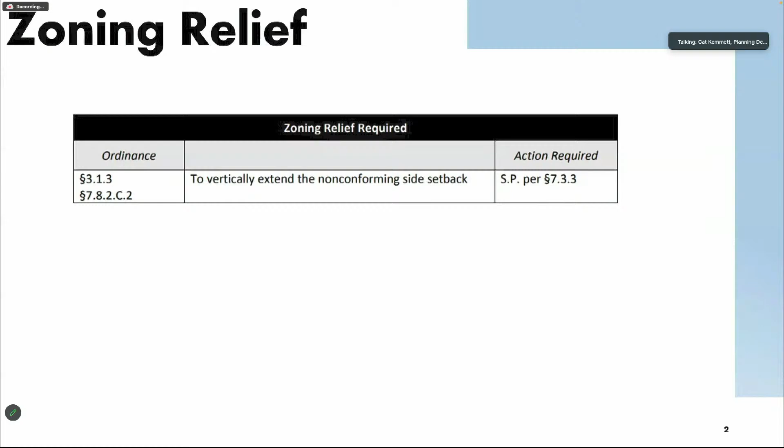First we'll hear from planning. Cat, I believe that's you. Good evening, everyone, hopefully everyone can see and hear me. This is petition 328-24, a special permit for 228 Grove Street. The petitioners are seeking to construct a second-story addition to the existing residence, which will vertically extend a non-conforming side setback, requiring special permit relief. In reviewing this request, the council should consider if the proposed addition will be substantially more detrimental than the existing non-conforming structure is to the neighborhood.

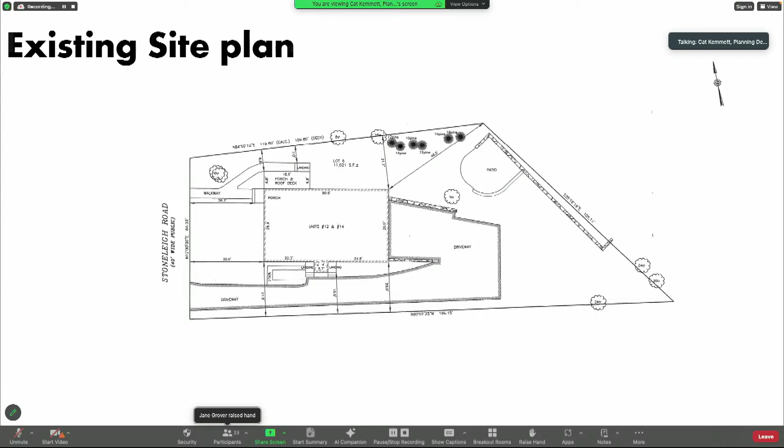This is the site plan. The site is improved with a 2-story single-family dwelling built in a colonial style and constructed in 1922. The lot slopes downward from the front to the rear, and there's a shed at the rear of the property, with a curb cut and paved driveway to the left of the house off Grove Street. There are existing nonconformities on the site, including the frontage, the lot size, and both side setbacks. The left side setback is 8.7 feet where 12.5 feet is required, and the right side has an 8.3 foot setback where 12.5 feet is required.

This is the proposed site plan. The petitioner proposes to construct a 2nd-story addition over an existing sunroom on the 1st floor. The majority of the addition will be within the existing footprint of the building, with the exception of a small cantilevered portion, which will extend beyond the footprint with supporting columns. So about 28 square feet will be outside of the existing footprint.

All of the setbacks will remain the same as they are now, so they won't be getting smaller, but the addition will vertically extend the non-conforming side setback on the right. So it does still require special permit relief. There'll be no change to the height or number of stories. The relief is limited to the vertical extension of the setback.

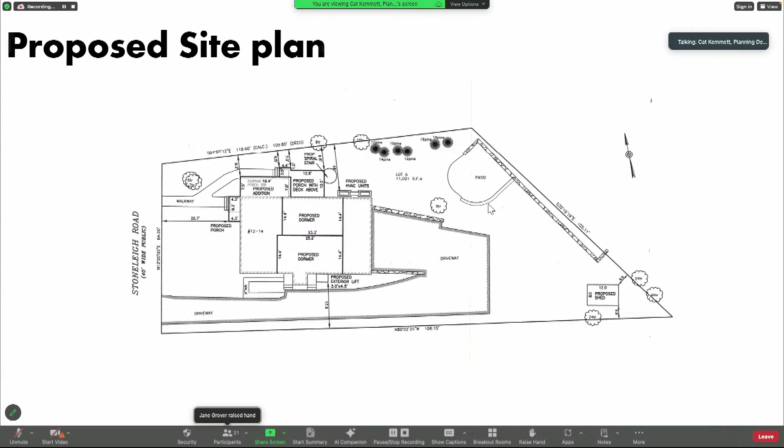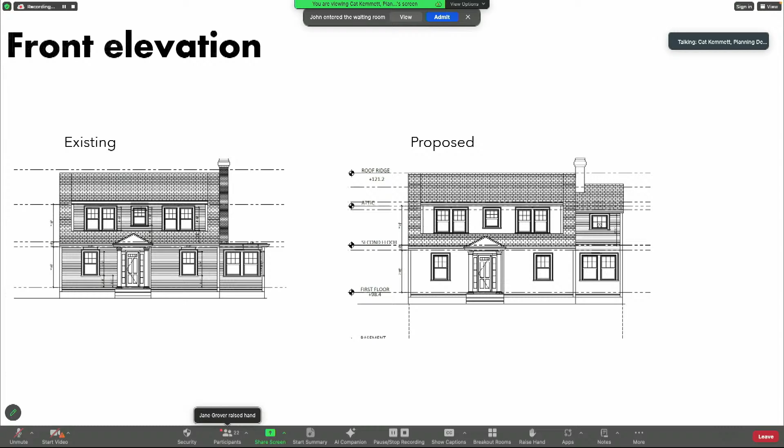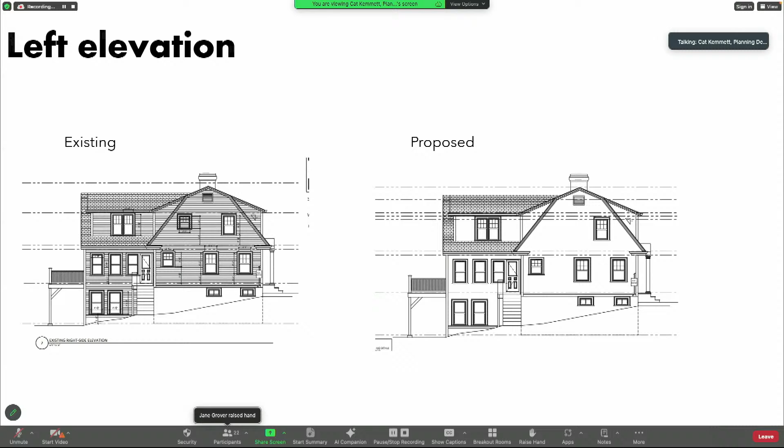This is the front elevation. The addition will be visible from the street, so the setback remains the same, but it will be built up vertically here. This is the left side. This setback will remain the same. There won't be any work visible from this vantage point. This is the right side, which will be most impacted by the petition proposed here.

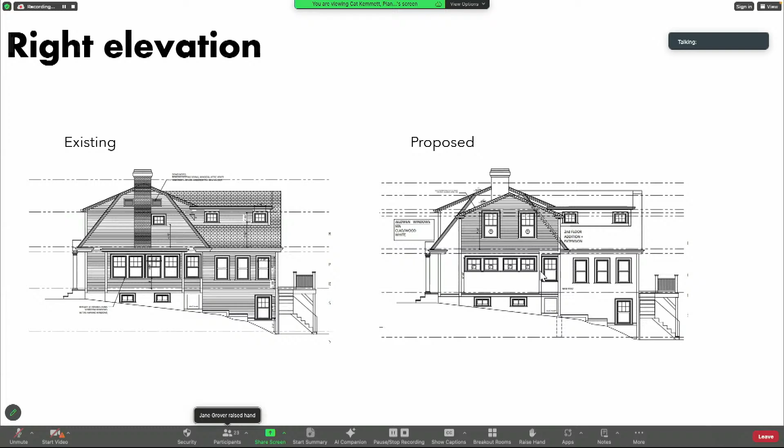Overall, staff have no significant concerns with the work proposed here. It's mostly within the existing footprint, so the amount of impervious added is minimal. It doesn't reduce any of the existing setbacks other than extending one upward, and it complies with other dimensional regulations, including height, FAR, and open space. So we believe any impact should be a fairly minimal negative impact on the abutters.

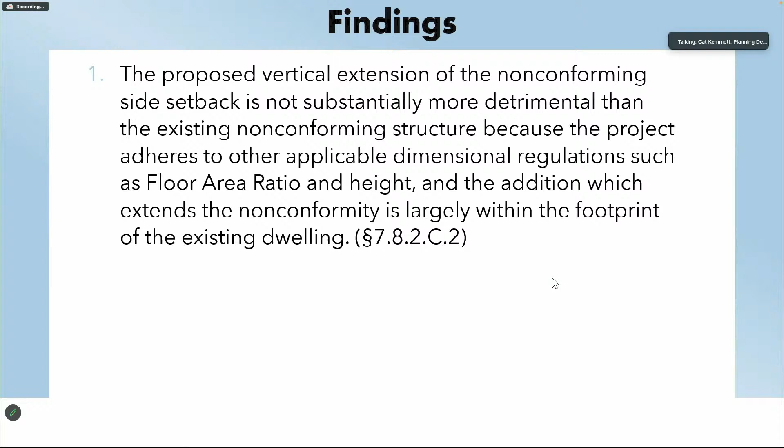And it would be the standard conditions of plan referencing, building permit conditions, and occupancy. Thank you, Ms. Kemmett. Does anyone have any questions about those standard conditions? If not, let's take a vote.

Counselor Block, Aye. Counselor Downs, Aye. Counselor Farrell, Aye. Counselor Kelly, Aye. Counselor Leary, Aye. Counselor Lovovitz, Aye. Counselor Lucas, Aye. Counselor Laredo.

Motion passes. Thank you, everyone, and good luck on that project, and thank you for being here, Jane Grover.

Can you please explain what happens after this? What happens after this is it will come to a full council meeting, usually at our next regularly scheduled meeting. The full council will vote on it then, all 24 members, and then you'll be able to move forward. Wonderful, thank you so much.

Sure, thank you again. The next item is number 329-24, which is a request to waive 2 parking stalls at 15 to 17 Playstead Road. Good evening, I'm Joe Adonisty, and I'll be covering this proposal.

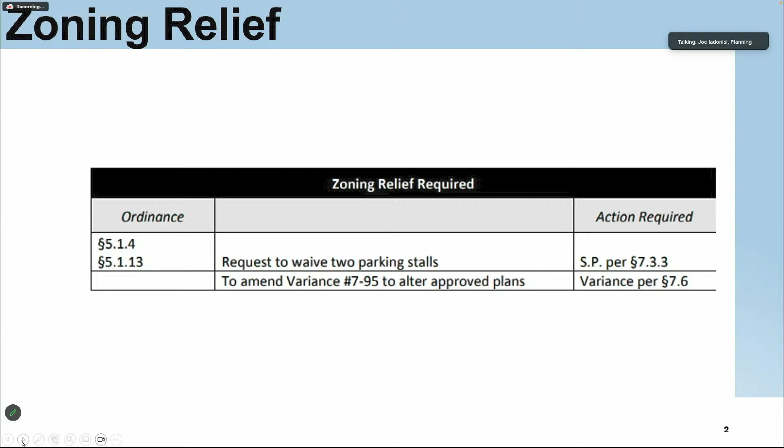So some background: the variance allowed them to waive the minimum lot area per unit, as the lot is undersized at just over 5,100 square feet, and that allowed them to have their 2-family dwelling.

Last year, they submitted a building permit to underpin and finish the basement, which basically meant that they wanted to lower the floor of the basement. But they went a little bit beyond the scope of that and closed off the garage.

So this would be relief after the fact, which I confirmed by talking to the Inspectional Services Department and taking a look at the property and seeing that the garage is in fact closed off. So the bottom floor is habitable space.

And just this past Friday, we had a complaint to ISD reporting 2 short-term rentals on the premise. One was confirmed to be active, and a violation has been issued.

So with that, and I know Jonah Temple, city from the city law office, is on the call as well, if he needs to clarify any of this. But typically, the guidance is to separate any zoning violations from what is actually before us. And the proposal here is for relief of 2 parking stalls for a 2-family.

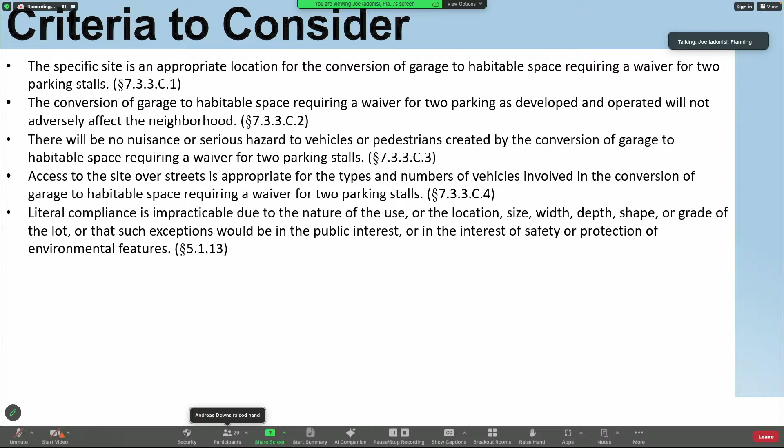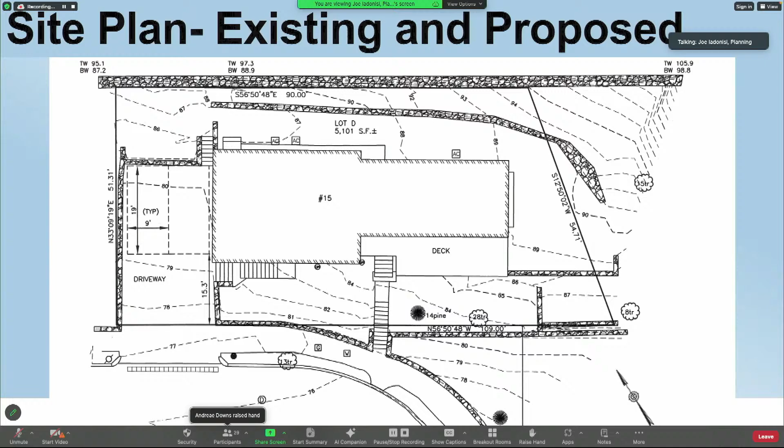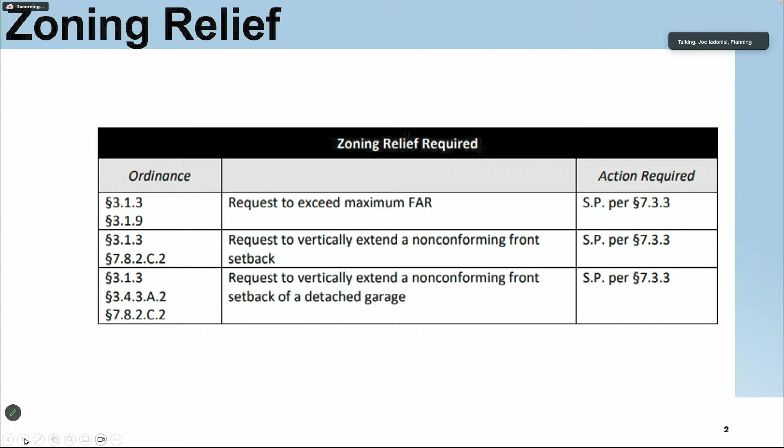There are three items which Councilor Kelly just described: exceeding the maximum floor area ratio, vertically extending the non-conforming front setback, and vertically extending the non-conforming front setback of the detached garage. When considering the criteria, it is whether the specific site is an appropriate location for the additions that will further extend the non-conforming floor area ratio and non-conforming front setbacks of the principal dwelling and the garage.

That the additions will further extend the non-conforming floor area ratio and non-conforming front setbacks of the principal dwelling and the garage as developed and operated will not adversely affect the neighborhood. That there will be no nuisance or serious hazard to vehicles or pedestrians created by the additions.

That access to the site over streets is appropriate for the types and numbers of vehicles involved in the additions that will further extend the non-conforming floor area ratio and non-conforming front setbacks of the principal dwelling and the garage.

That the proposed increase in the floor area ratio from 0.33 to 0.56, where 0.45 is the maximum allowed by right, is consistent with and not in derogation of the size, scale, design of other structures in the neighborhood. And lastly, that the proposed extension of two front setbacks for the principal dwelling and the detached garage is not substantially more detrimental than the existing non-conforming use to the neighborhood.

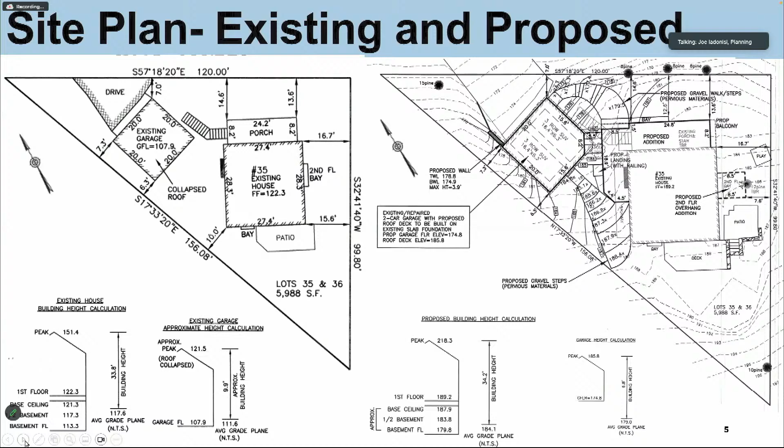On the site plans, the grading changes are generally limited to create a slope upward that supports the steps, with some level area in between where the steps are proposed, plus a walkway to a roof deck on top of the garage. That's where the most significant fill and grade change is, with fill up to about 4 feet. Otherwise the fill and grade changes are limited to the steps and aren't used to manipulate the overall height, sink the basement, or change the floor area ratio calculation in any meaningful way. Minor grade calculations result in a 0.4 foot increase in overall height, plus some work with dormers I'll show on the elevations.

As you see on the Google Maps and Google Earth view, there is that significant slope. The front right, where the minivan is located, is where they're proposing the garage. They're planning to add in front, where the porch is, from the basement through the first floor and second floor, with an additional dormer and roof deck area above the second story. On the left, they have a library that will be in between floors.

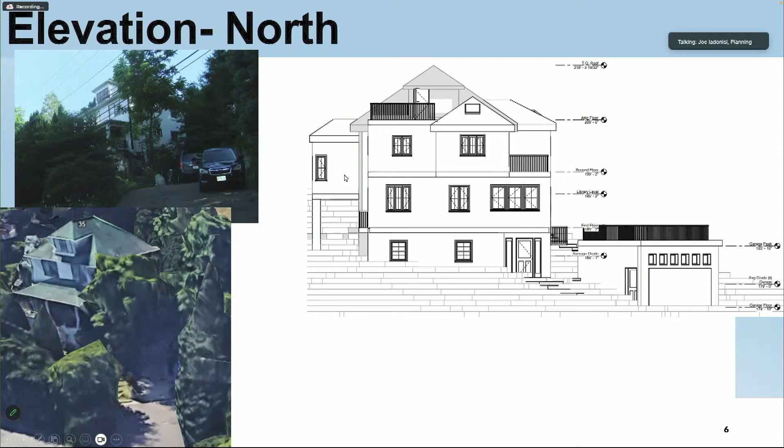A look at the west elevation shows where they're pushing out a little toward the west, or right side, of the house, going up to just above the second story but not all the way up to the top of the roof line.

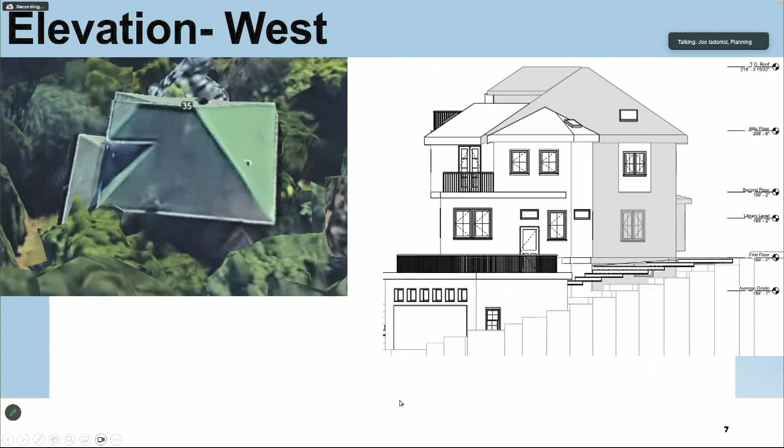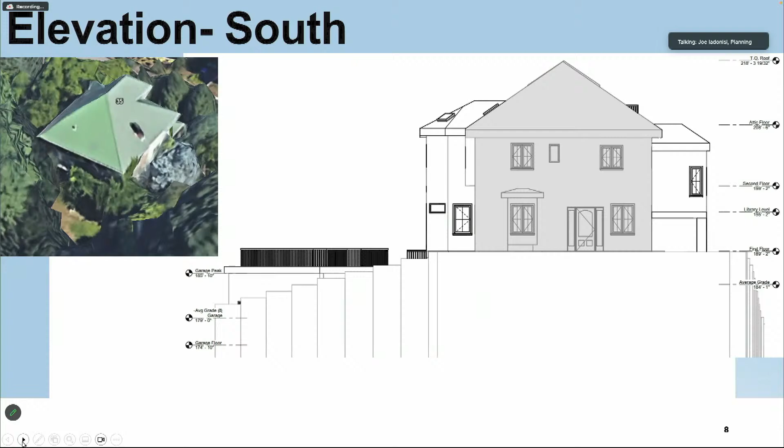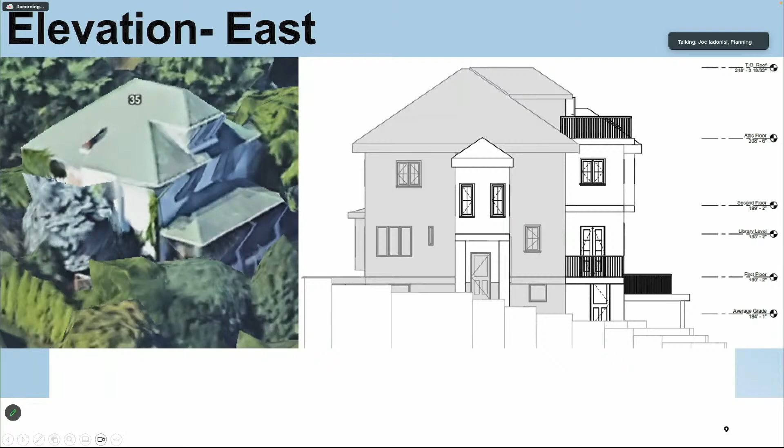Thank you very much. Is somebody here for the petitioner?

Thank you, Madam Chair, members of the committee. For the record, my name is Terry Morris, an attorney with offices at 57 Elm Road in Newton. I'm pleased to represent the homeowners, Peter and Mary Jo Dennis, and their two children, Sam and Alan. I also want to commend Mr. Iadonisi for his very detailed explanation of the reasons for the floor area ratio increase, largely dictated by the topographical condition of the site and the shape of the lot.

I also want to introduce, on screen, Ms. Megan Tarosian, our architect, part of our architectural team, and if possible she may share the screen. Also with me this evening is our architect, Mr. Ron Jarek, as well as Mr. Dennis, to answer any questions.

If we could, we'll start with the presentation. I think Mr. Iadonisi has shown the site plan and the area map, so we can skip through those and go right to the floor plans.

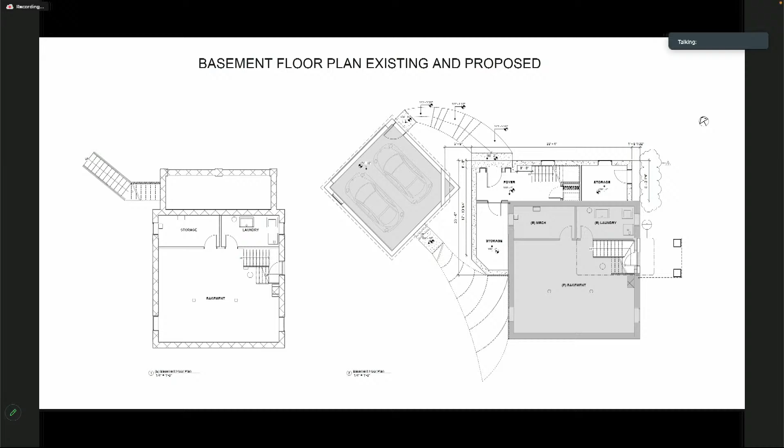Actually, I think we have the photographs, don't we, Megan? Probably it's helpful to see.

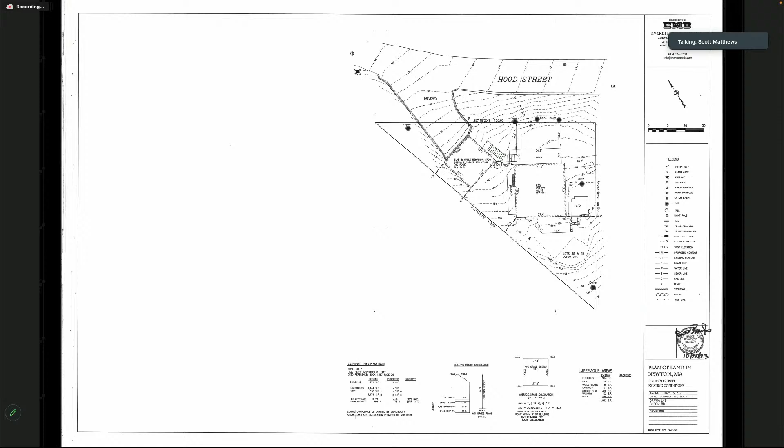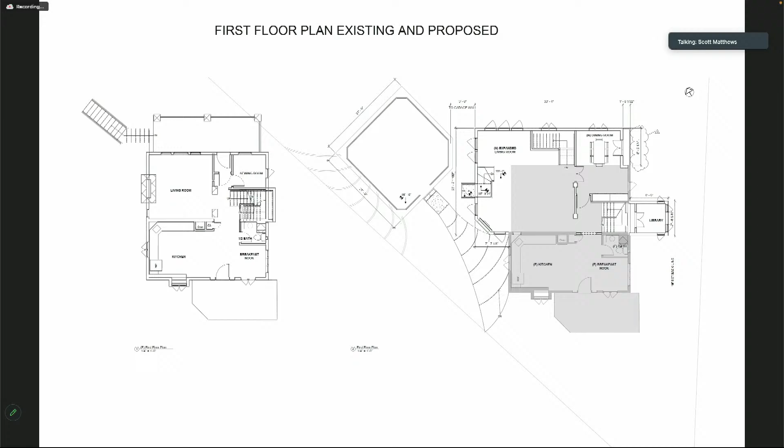You can see that the living room is quite modest, and to the upper right-hand corner of the screen there's a sewing room in the existing plan that, with the expansion, has now allowed for the creation of a dining room and an expanded living room. If we go to the next slide, please.

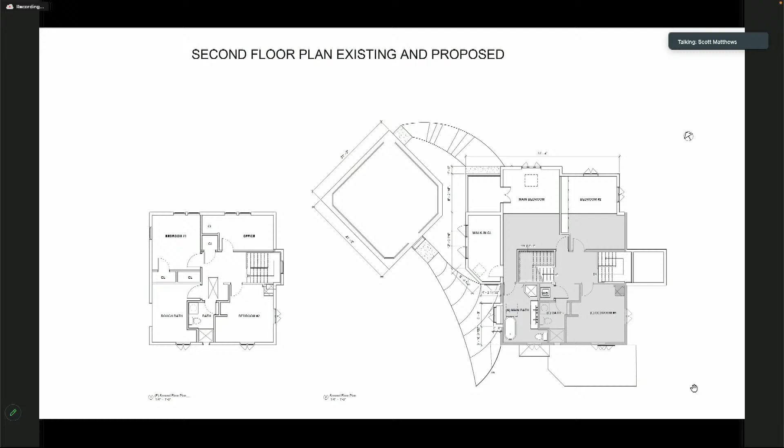You can also see on the right-hand side where Mr. Iadonisi has shown the extension on the east side of a small library, one-story addition. Next slide, please. There you have the attic space.

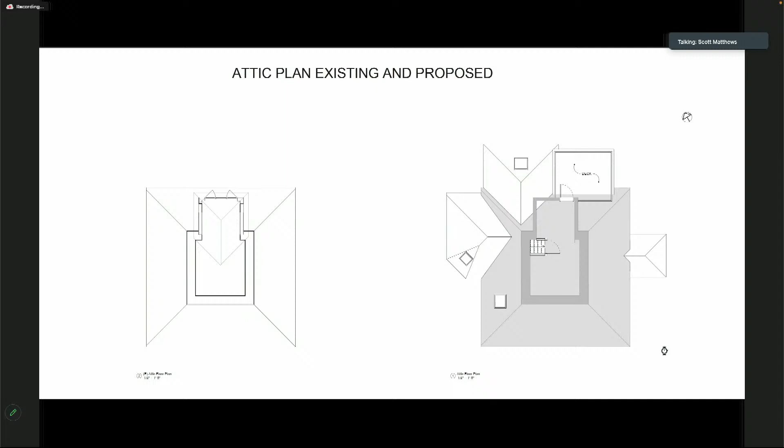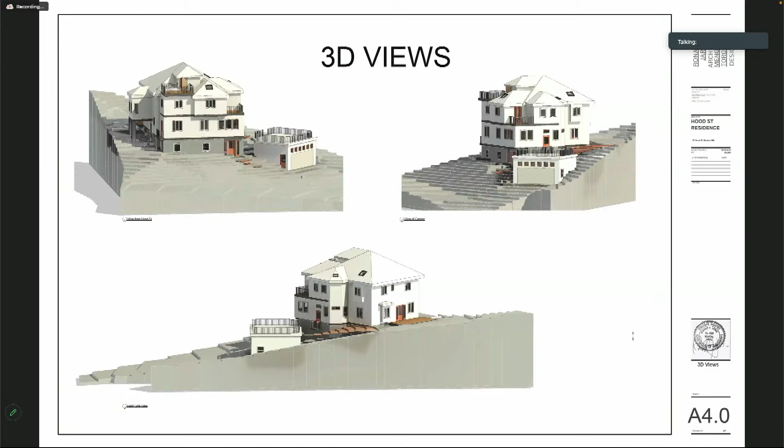Next slide, please. And here we have an actual to-scale drawing showing what the finished garage would look like in the foreground, and in the background showing the house as upgraded and refurbished. And with that, Madam Chair, that concludes our presentation.

But as I say, Mr. Dennis is here to answer any questions the members may have about the changes being made to accommodate his family's current needs. Thank you. Thank you very much, Mr. Morris.

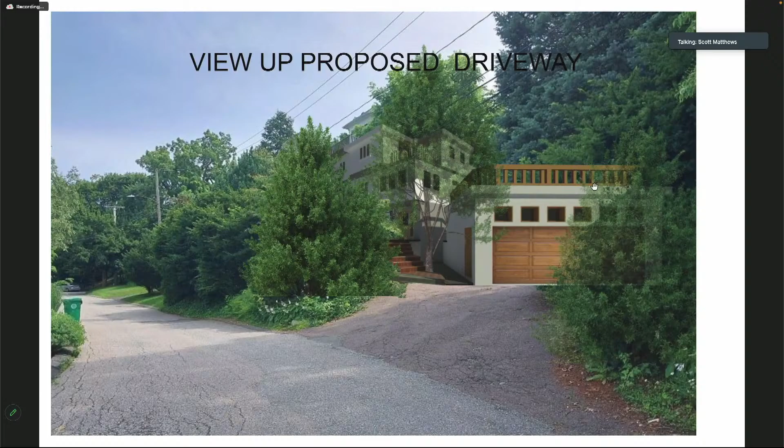Are there any members of the public, either in the chamber or on Zoom, who would like to speak on this?

Shockingly, no. So we can ask the question, though: did you reach out to the neighbors? Are the neighbors aware of this project, and what have they had to say about it? If nobody's here to speak, that's a question we might want to ask the petitioner to address at some point. I guess I'm asking that question. You don't have to answer right now. Others may ask that when it's their turn.

If no members of... Mary Lee Belleville.

I tried to answer my question by looking at the documents. This went before Historic Commission. Was it preferably preserved and they've gone through that, or did they approve the plans? It was determined by the Historical Commission that the property was not preferably preserved. Okay, but it wasn't a total demo, right?

No, it's not a total demo. So they made that determination administratively, which usually indicates it was a rather simple, clear-cut decision if they do that and don't bring it to the commission, typically.

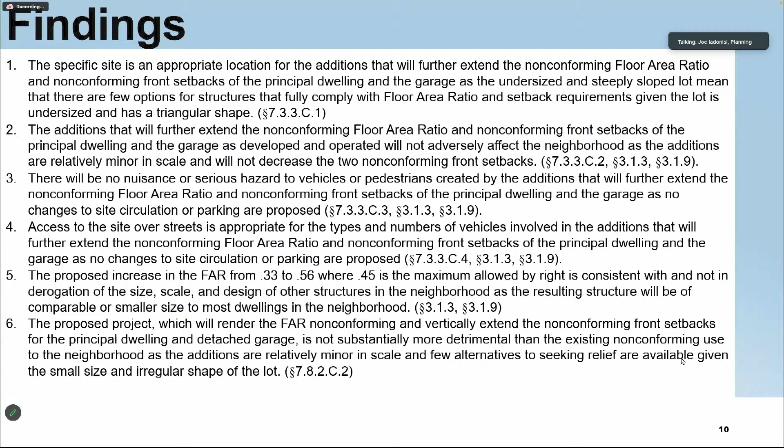And lastly, that the proposed project, which will render the floor area ratio non-conforming and vertically extend the non-conforming front setbacks for the principal dwelling and the detached garage, is not substantially more detrimental than the existing non-conforming use to the neighborhood, as the additions are relatively minor in scale and few alternatives to seeking relief are available given the small size and irregular shape of the lot.

And we just have the standard conditions for this proposal. Thank you very much, Mr. Iadonisi. We'll take a vote.

Counselor Block, Aye. Counselor Downs, Aye. Counselor Farrell, Aye. Counselor Kelly, Aye. Counselor Leary, Aye. Counselor Lobovitz, Aye. Counselor Lucas, Aye. Counselor Laredo, Aye. Motion passes. Thank you, everyone.

Good luck with that beautiful project. Only two more to go tonight.

The next one is number 331-24, which is a request to extend a non-conforming front setback at 98 Parker Ave. Again, we'll hear first from planning.

Good evening. This is Kat Kemet again from the Planning Department. This is petition number 331-24, a special permit for 98 Parker Avenue. The petitioner proposes here to construct a larger front landing, including new stairs at the front entrance of the existing dwelling.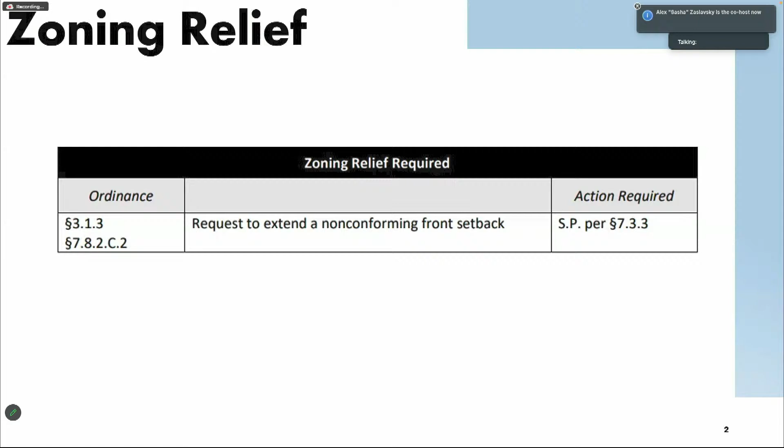The expansion of this landing will further extend the non-conforming front setback. So that's the only element of relief here is to extend the non-conforming front setback. In reviewing this request, the council should consider if the proposed extension of the non-conforming setback is substantially more detrimental than the existing non-conforming structure is to the neighborhood.

This is the proposed site plan. There are a few existing nonconformities on the site, including the size of the lot, which is 6,160 square feet, where 7,000 is required. The front setback as it stands now is nonconforming with a 21.8 foot front setback where 25 feet is required. There is an existing landing and steps on the site that extend into the setback, which results in an 18-foot front setback.

But because the steps and landing are a minimum requirement in the building code, which these steps do meet, the existing landing and steps are not considered in that setback measurement for the purposes of zoning. The petitioner here is proposing to remove those existing front landing and steps and to create a new front landing and steps that will be a bit bigger, with the intention of making it easier to access the front of the house.

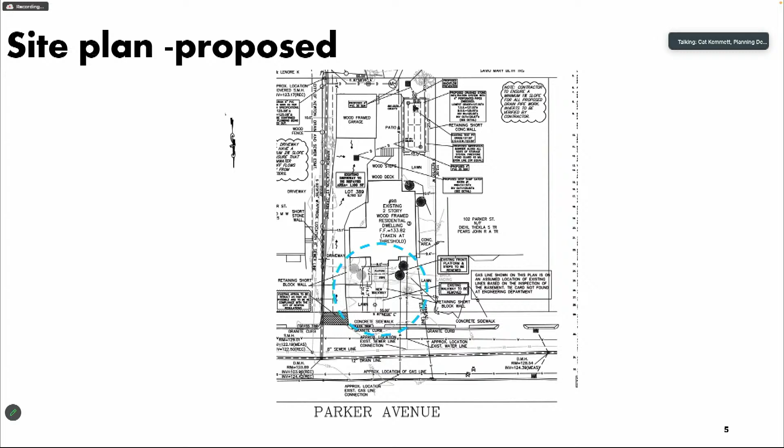Overall, we didn't note any major concerns with the relief requested here. The work proposed does encroach a bit further into the front setback than what currently exists today, but the work is limited just to the stairs and the landing. It doesn't add any additional relief for floor area ratio, open space, lot coverage, anything like that. So we believe it's unlikely to have a major impact on neighborhood or on abutters.

Thank you. Thank you, Ms. Kemmett. I think we've mentioned this before. I'm just going to say to you that sometimes your microphone on your speaker cuts out, so we don't actually get to hear all of your words. Just something for you to be aware of. Oh, my apologies. I wasn't aware. Yeah, we've had that conversation before, but I think we got all the important things you're saying, but sometimes it just cuts out.

Let's hear now from the petitioner.

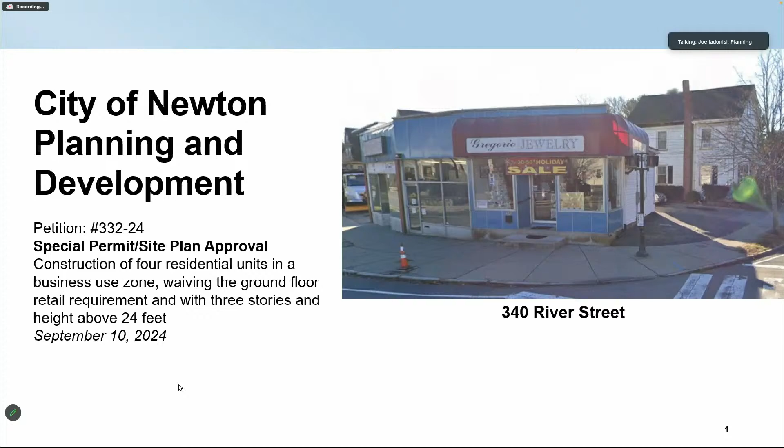At 340 River Street and 76 Lexington Street, planning will give us a quick overview first. Hopefully quick, I'll do my best, Counselor. Joe Iadonisi, I'll be presenting this petition for 340 River Street.

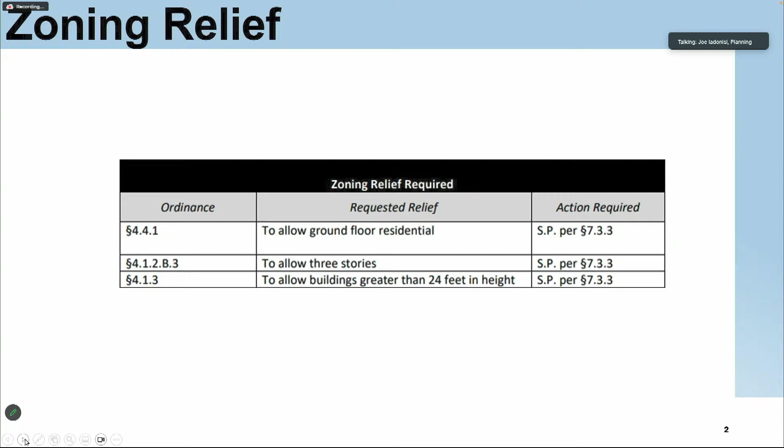There are three criteria that the counselor listed, as it is in a business use zone. The building type is townhomes, or single-family attached looking units. They do have ground floor residential proposed, and they are greater than 24 feet in height, and they do reach three stories, and each of those items requires relief.

The criteria to consider are that the specific site is an appropriate location for waiving the ground floor retail requirement for the business use zone and allowing three stories and height greater than 24 feet; that this waiver, as developed and operated, will not adversely affect the neighborhood; and that there will be no nuisance or serious hazard to vehicles or pedestrians created by the waiver.

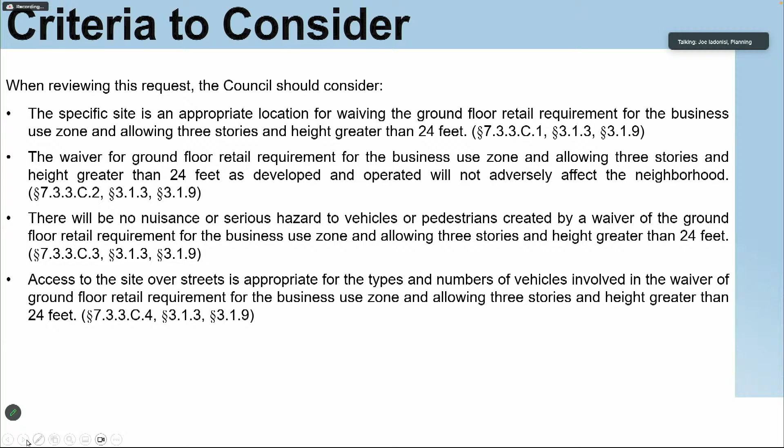And lastly, that access to the site over streets is appropriate for the types and numbers of vehicles involved in the waiver of the ground floor retail requirement and the height and stories allowance. This is a look at where the location is.

It is pretty close to the border of Waltham, directly across the street from De Pasquale's at Nightcap's Corner, and then just down the road from a variety of industrial, manufacturing, and business uses, as well as some extension of public parklands, multi-residence and various multifamily uses, as well as single residence uses. So definitely a variety of building types, uses, and structures in the area.

The petitioners with this proposal are merging the lots at 76 Lexington Street with 340 River Street.

This is a look at what is currently existing on the site. There are 3 small storefronts along the corner of River Street and Lexington Street. One is currently occupied by a jeweler. They've had a bunch of different uses over the years—grocer, nail salon, barber, other small retail type uses—but 2 are apparently vacant at this time.

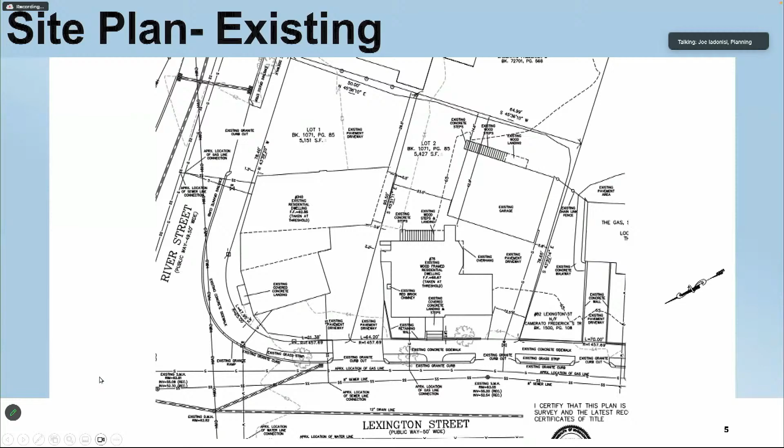As a correction to my memo, it is not a single family home at 76 Lexington Street. It is a 2-family home, as Chief Zoning Official Jane had in her memo, and attorney Terry Morris also pointed out. It is a prior existing 2-family, but I wrongfully saw the building and assumed, as it appears as a single family, that it is. But they do have some living space, or conditioned space, above the garage. Generally this building does appear as a single family, which is where the confusion stemmed from.

This is a look at what is proposed on the site. They have 4 residential units proposed, each with 2-car garages, and they each have 2 front setbacks, one along Lexington, one along River. They conform with those, as well as with the side and rear. They have walkways going towards the site as well as the garage and the housing units.

Otherwise, they do have some landscaping area to the rear and to the other sides that is not present currently. The total lot area is just slightly more than 10,000 square feet, and they are adding about 3,000 square feet of pervious surface, whereas almost the entirety of the site currently is impervious. So that will be a bit of an improvement as far as stormwater is concerned.

However, they will still need to go through minor stormwater review when it comes time, if and when it comes time to apply for a building permit for this project. They will have to show more than is on the site plan as far as how they plan on handling stormwater and drainage on the site.

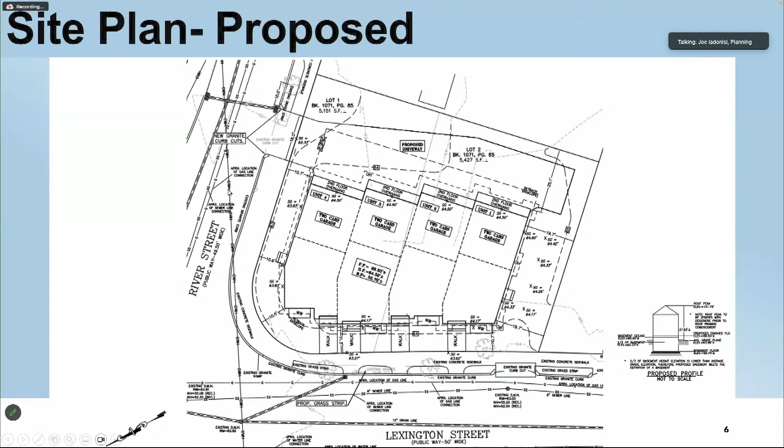I'll leave a little bit of time to just look at this, but there's nothing in particular to point out that I haven't covered in the previous site plan. 4 total units again.

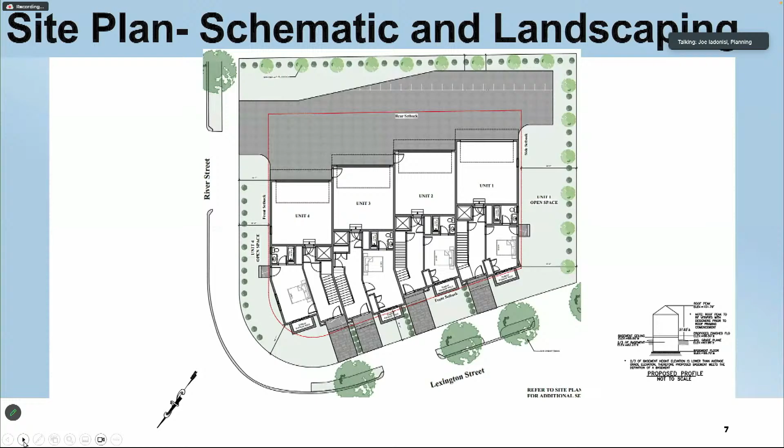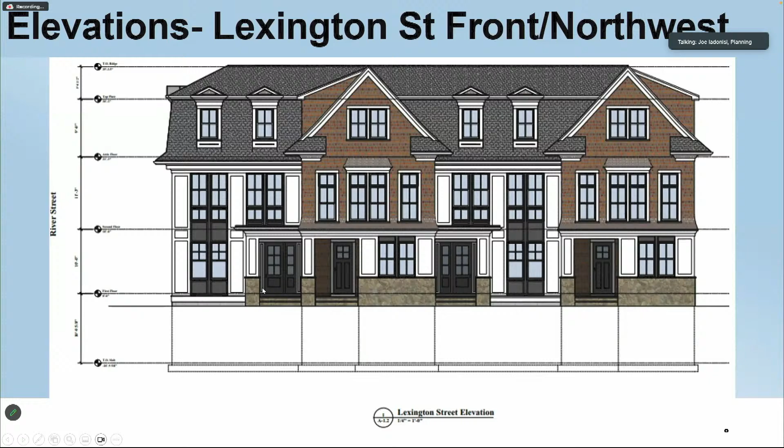There were also some changes to the architectural plans since the land use memo. They did not require planning staff to send it back for a zoning review memo a second time, as none of it affected any zoning dimensions. It was just a relocation of the door along the River Street frontage front elevation, as well as the addition of a couple windows. There were no zoning dimensional standards or changes in size of the building or on the site itself.

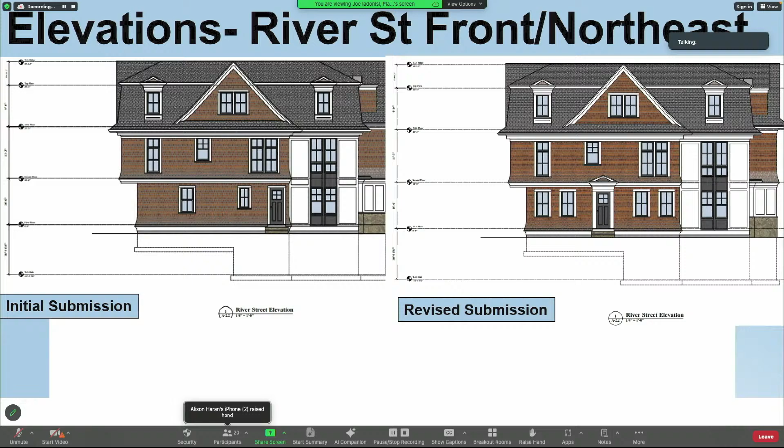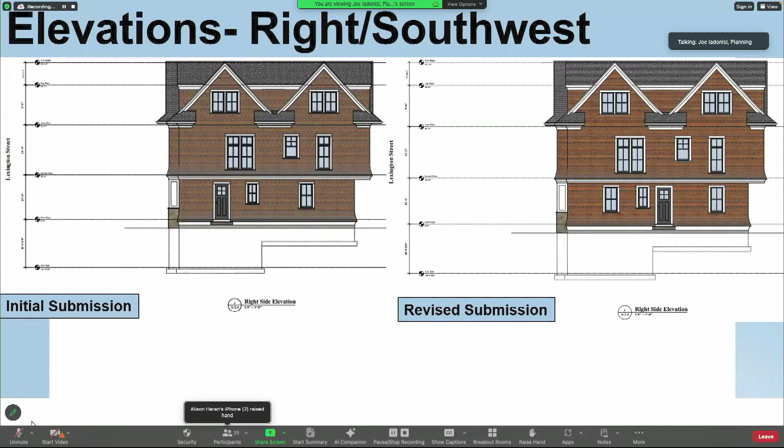This is a look at the proposed landscaping plan. We are requesting a little bit more detail on the plan, caliper inches and things that will be needed to demonstrate compliance with the tree ordinance. There is only one tree remaining on the site currently, so this is a general improvement, but we are looking for slightly more detail in the plans in the future.

Otherwise, things to note from planning staff is that this at 37.8 feet will be larger than other residential uses in the surrounding area, and we have asked the petitioners to consider if that height can be reduced at all.

Lastly, there are definitely some traffic issues with River Street and Lexington Street that have been presented, but overall this is a generally positive change with the closure of 2 curb cuts and the movement of a curb cut away from River Street. While the retail uses are currently 2 out of 3 vacant, moving from 2 units to 4 residential units, and previously having 3 retail units, should be a generally positive impact on traffic, with retail uses having more in and out customers and employees than residential uses generally have, with people coming and going generally at the end of the workday.

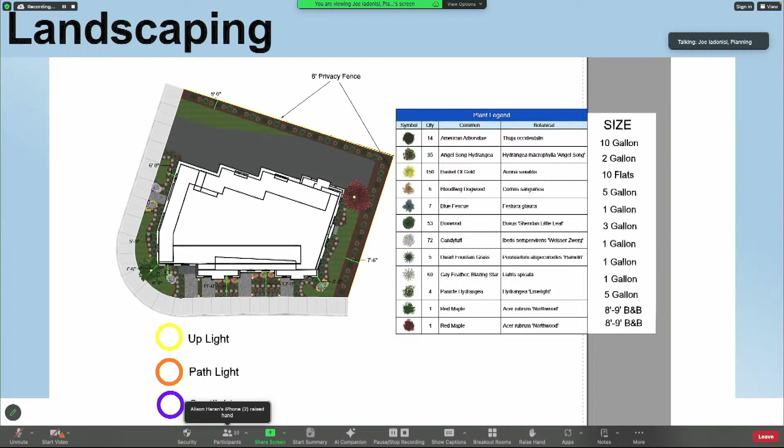But that is overall very minor in scale in terms of traffic. And additionally, while minor in scale, an increase from 2 to 4 residential units is a slight move towards our goals in the housing production plan, as well as the Newton comprehensive plan. And that concludes my comments from planning, and I'll turn it back to the council.

Thank you, Joe. Before we hear from the petitioner, who will augment whatever they think is important that you didn't mention - correct me if I'm wrong, this has been part of a long-standing proposal development - do they need to resubmit a demo delay request, or is that all taken care of? Joe, you can either answer that, or Mr. Morris could answer that.

Thank you so much, Counselor. Yes, I absolutely forgot to cover that. The applicants applied for demo and were approved for demo a few years ago, and since then time has elapsed and they need to return. They've submitted a request to return, but have not yet come before the Newton Historical Commission to be granted that. There was a demo delay of 1 year imposed for 76 Lexington Street, and there was no demo delay or preservation for 340 River Street, those 3 retail locations.

And when did that expire? That expired in 2021. You have 2 years after the demo delay. Okay, thanks, so we'll be sure that that gets covered.

Mr. Morris, thank you, Madam Chair. Again, for the record, my name is Terry Morris. I'm an attorney with offices at 57 Elm Road, Newton, and I'm here representing the owner of the property, 340 River Street Realty Trust. I would point out that my clients only recently acquired title to the property in July, and that explains one reason why they couldn't file an application for demo.

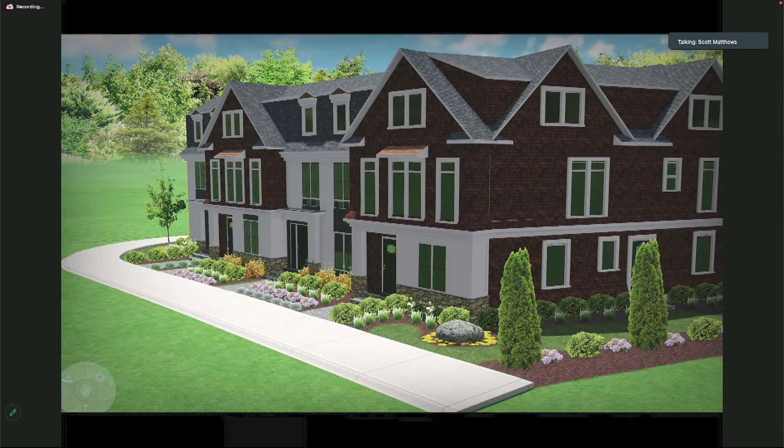Let's go show you now the landscaping, which we think these perspectives give you a better sense of—what it would look like with the landscape installed. That is looking at the property from... which corner is that, Gene? Looking down—that's actually the front of the building looking north on River Street. Go ahead, next one—there's the full frontage facing Lexington Street.

Next, there is the facade, the corner looking at River and Lexington. You can see the facade was changed on River Street to show more of a residential look to the presence on River Street, which we think greatly enhanced that side of the building. Gene, throw the back.

That's a closer look of that elevation, and then the rear. Here we see the back of the building with the landscaping strip along the back. We are proposing also an 8-foot fence around the perimeters of the property.

Here you have the landscape plan. One of the things that was called for was to have the landscape plan dated and signed by the author, and there you see Bobby Designs has basically stamped that plan. We've already seen that, so we can skip through.

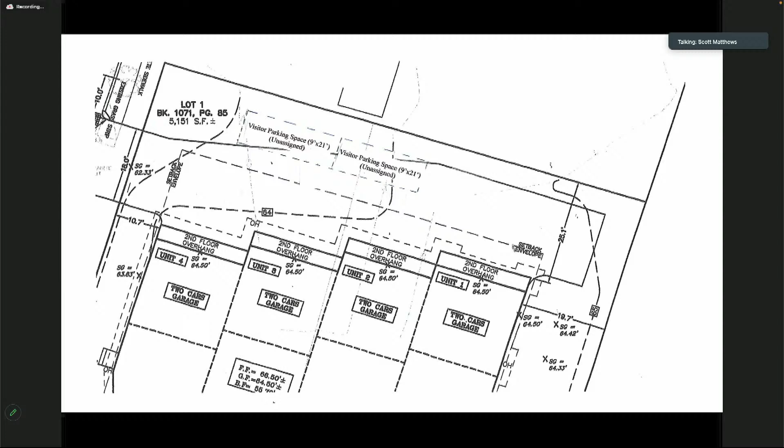Lexington, the one that's 76. I just wanted to say I think the potential impact on that home could be pretty significant for a 37-foot plus structure—you would kind of loom over it. What would be the distance between that property line and... I don't think that's a one-story, you can see it off to the right. I think that's a two-story structure, it's pretty small, that's a modest garage, I think that's the garage you see.

No, I see the garage, but you could go to Google Maps and get a better view of it, which I did. Counselor, it's set back 25.1 feet from the abutting property behind it on River Street, so it's a pretty significant setback.

The other thing is, this isn't before us, but did you look at putting in commercial spaces here at all? Because there is a successful business across the street, and it is a business zone, and I always like to see if we can keep some of our commercial spaces. Was that ever considered? It wasn't largely because of the vacant storefronts that have been existing there for quite some time. The business you're talking about is Jeep Pasquale's, yes.

Who's also a client of mine, so I know that is a particularly attractive use because it's a restaurant, which obviously generates a lot of traffic. Right, so no, we did not—to answer your question, there was no consideration of ground floor commercial, because quite frankly we don't think there was sufficient parking to accommodate that use.

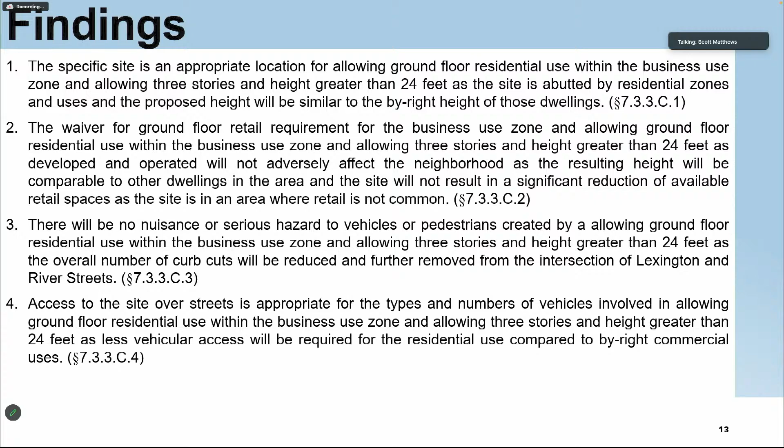That would be terrific. Councilor President Laredo: Look, I don't want to get hung up on this, but we do have a land use committee meeting on the 17th. Is there a reason we can't get this back here on the 17th to get this ironed out and then take it forward on the 6th of October? I'm just trying to be practical here. You've got a council meeting Monday night, there's no way they're going to get their work done between now and Friday, and planning's not going to have an opportunity to review this properly. So if all we're doing is postponing this in any event to October 6th, wouldn't it be much better institutionally to get our work done in committee so we can do this on first call, not second call?

Yes, I agree, and I believe I'm hearing them say they can meet that timeline, and I think that makes sense. But the caveat is, are you comfortable, Madam Chair, scheduling this for next week? I don't know what else you have in the docket, but I don't think this would take that long, quite frankly, I think this would be quick. Next week? Well, it's a busy docket, but we've also gone over most of it tonight. I don't think we have to have a very full conversation at the next meeting. We've had the conversation this evening, we just want to see these changes reflected. I'm just trying to simplify our full council meetings, I don't want us on second call. I'm just trying to confirm, frankly, this is the person we need to confirm the dates with, Tariq and I.

Do we have to do a vote to reconsider the hold? We voted against the hold. We're going to need another motion. Councilor Lucas first, then Larry. I was just going to say the motion to hold failed, so that's why I made the motion to approve subject to second call. But if we can do another motion to hold, I will vote again for it. Yeah, or you could withdraw that motion and just make another motion. Motion to hold again.